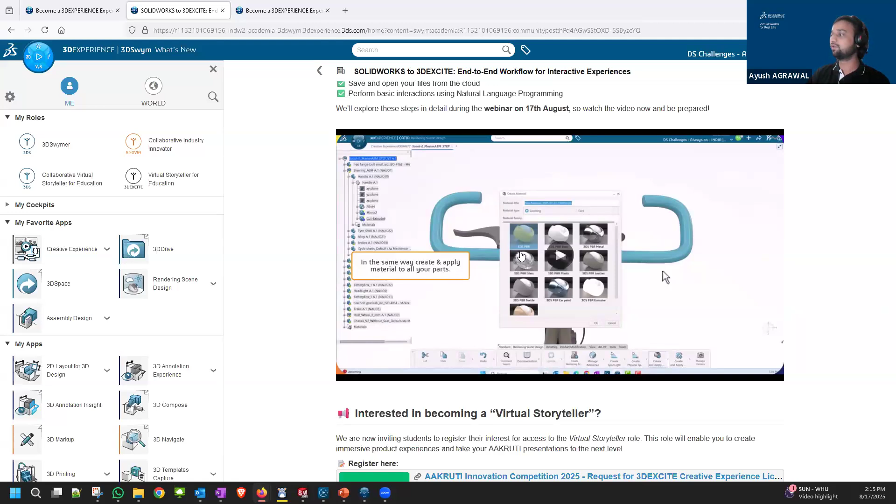If you scroll down in this post, you'll see a link, which is a survey link for registration. Anyone interested in using this application has to register here, and that will give you access to the Creative Experience app. Basically, you'll get the role of virtual storyteller for education. Please register here as soon as you can, and you will receive an email confirmation that you've been granted this role.

Once you have access to this role, you should see this Creative Experience app in your compass. Basically, you have to click on the compass. In the search bar, first make sure you have this role, virtual storyteller for education, and then go and just type Creative Experience, and you'll have this role.

Now, the first time you try to launch it, it will not launch because you have to first install it. If you click on this dropdown - because I already have it, it's not asking me to install - but for your case, it will ask you how to basically install the app on your computer.

One thing I'd already suggest is make sure you install this application on a good system, because the minimum system requirements would be at least 32 GB of RAM on your computer and a dedicated graphics card like AMD or NVIDIA. If you have that, then you can install.

Let's start. This is my product, an electric scooter. What I have to do in SolidWorks is just go to Save As. Then in the save type, the format drop-down, there are multiple options for exporting.

For this case, I'll suggest we go with the step file because it's a universal format available in most CAD or parametric design softwares. But if you're using SolidWorks, you can also export it as a SolidWorks assembly or SolidWorks part, which is also accepted by the 3D Experience app.

For now, we'll just export the step file. Please check that the options of your export fit your purpose. For my case, I've selected the step format and solid surface geometry export output. I'm exporting everything—the faces, the export appearances—and once you're done with your settings, just give it a name. I'll name it scooter session 1, step file, and save it.

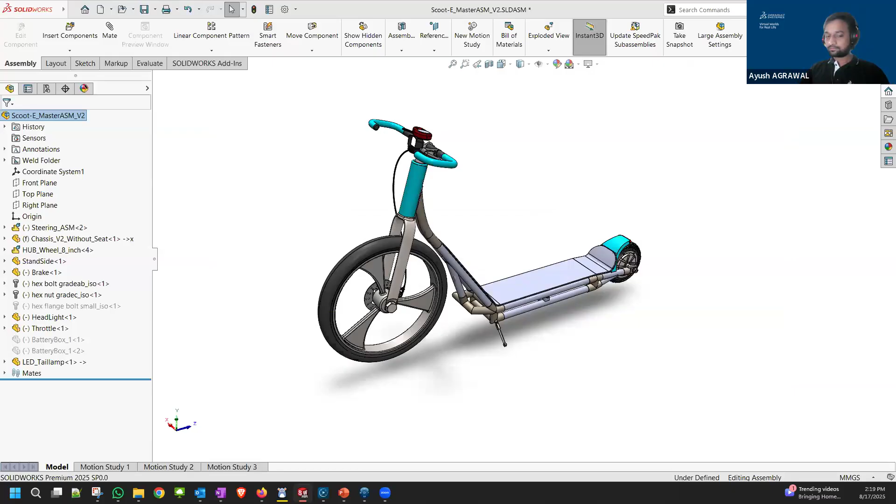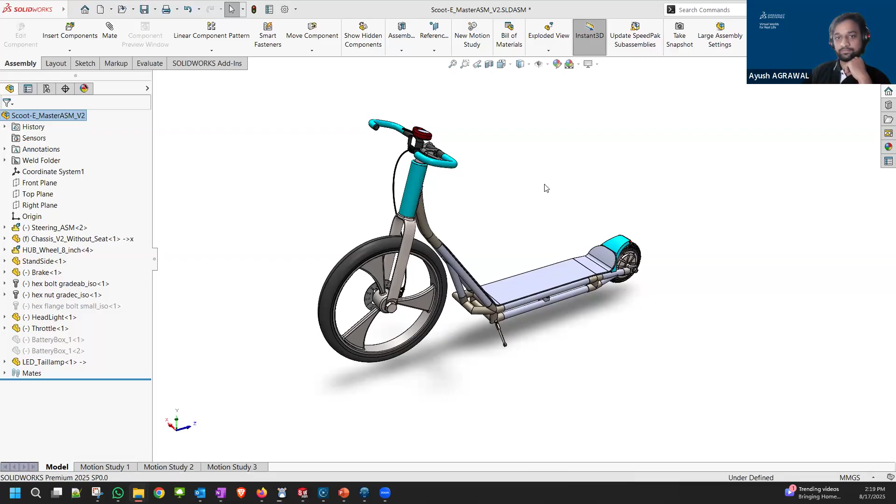It's exporting. My export is done. I have my step file.

Now the next thing we do is just go to the platform. Go to your student community—that's good because you're already on the right tenant.

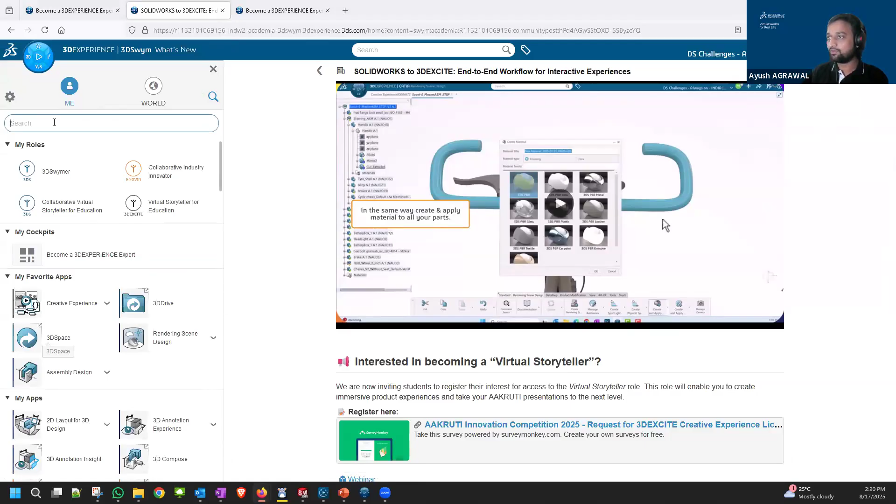Before we launch the Creative Experience app, the first thing we need to do is set up a collaborative space for your team if you haven't already done that. But I can quickly show you how to do it. Again, on your compass, search for the 3D Space, and I'll tell you why we're doing this.

That opens the collaborative spaces. You'll see I've already created a collaborative space, 3DEXCITE AAKRUTI 25 3D Experience Training. If I open it and go to members, I've already added Pradnya as a leader and owner, because the first thing you have to do is import your product onto the platform, onto your cloud.

So I go back—how do you create a new collaborative space? You just click this button available here, write in your team's name, whatever it is, and your product. You give it a description if you want, keep the family as design, and visibility as private.

Once you create it, share access with your team members. For example, this is the 3D space you created. Go to this eye symbol, and in the members section, click add members and start adding people. Please add your direct team members as leader and owner or author, since they'll have access to add more content.

They'll have rights to rename it, delete it, those sorts of access rights. If you add contributor, they'll just be able to view it. All right, we have our 3D space created.

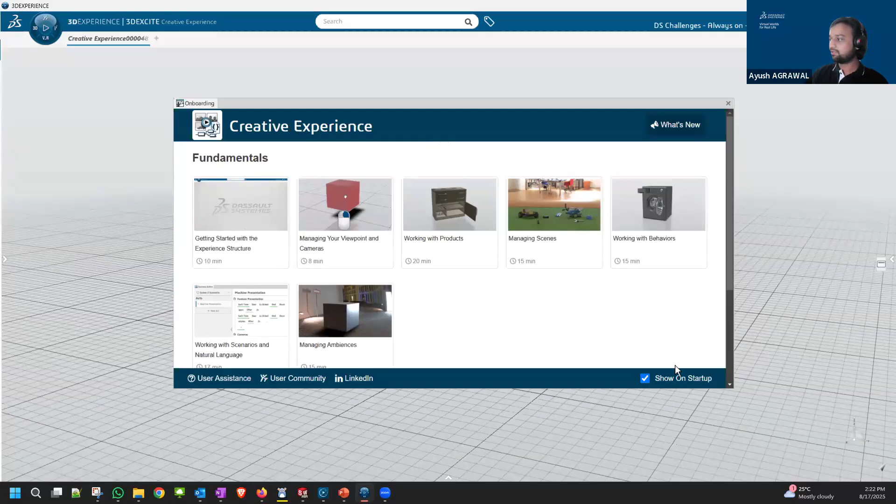So this is already a good guide. If you have any questions or are confused on what to do, you can refer to these. But for now, I'll close this. When you close it, it opens up a scene.

So it already creates a creative experience. So here you see our creative experience has a random name, but afterwards we'll rename it. Now, make sure that in your creative experience, before we import anything, you drop down here and check which collaborative space you are inside.

You might be in the common space, which is accessible by all the teams in the AAKRUTI contest, but you have to select your private collaborative space so that your data remains with yourself and your team. Once you have selected your collab space, next thing we do is import.

Now, a thing to understand here is that there are two kinds of imports that we'll do. First, we will import your product on the collaborative space, but that doesn't mean it's already in the Creative Experience app. We have to then insert your product on the Creative Experience app afterwards. So first step, click the plus icon here.

Before I do that, let me give you a little bit of context. So here, this is your browser, which is the cloud-based platform. Once you click on the Creative Experience app, it launches this window, which is basically not the cloud, but a native app that you have installed on your computer. It's called the 3DEXPERIENCE Launcher. I hope that makes it clear.

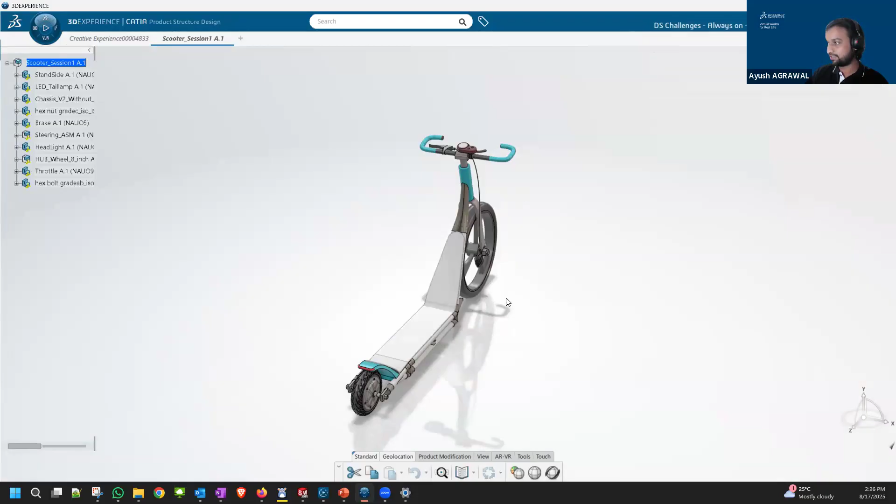Now what you see here is the product imported on your cloud, but this is not in Creative Experience yet. If you look at the top here, it is telling you it's CATIA product structure design, meaning it is just a preview of your product that has been imported, right? And it is not yet in your Creative Experience.

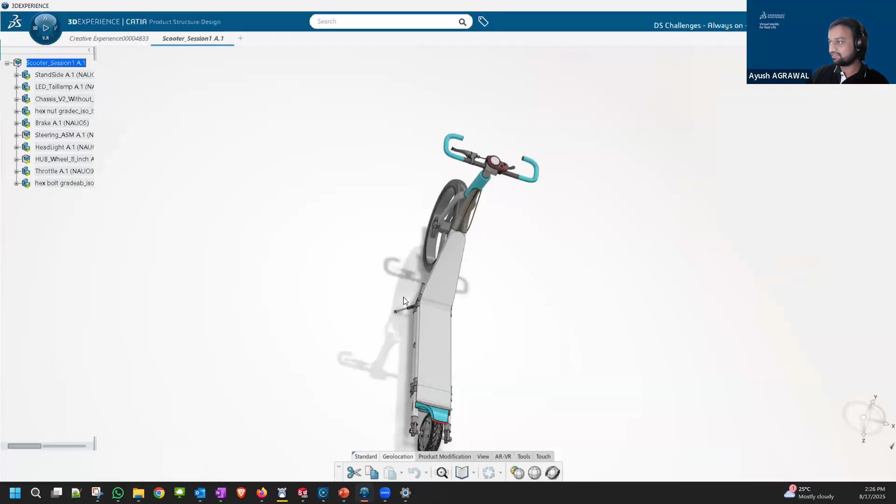If I go to the Creative Experience app, you don't see anything here, meaning you have to still import this product in your Creative Experience app. Now there are multiple ways of importing, but first thing that I would suggest to everyone to do, and it's very important: once you import the product and it gives you a product preview in the CATIA structure design, right click on the top node of your product and go to the properties.

You go to the properties, and it will open up this dialog box. It tells you a few things.

What I'm going to do is copy a few things from here. I'll copy the title, which is the name of your product, and put it in my notes. I'll also copy the PRD name, because imagine you have 3 or 4 team members working together on a product. Everyone exports different files at different times throughout the contest, so it might be possible you have the same title for your product.

So if your product is a scooter, you'll always name it a scooter or something. But when you import it, you get a unique product name - it's a PRD name, a PRD ID. You'll see this is always going to be a unique ID.

This is very important because, for example, if I exported this today, the PRD name is always going to remain the same. I can edit my title, but this stays the same. So every time I want to import it in Creative Experience or any other app, I can search it via this PRD name. I copy it and paste it into my notes so I don't forget it.

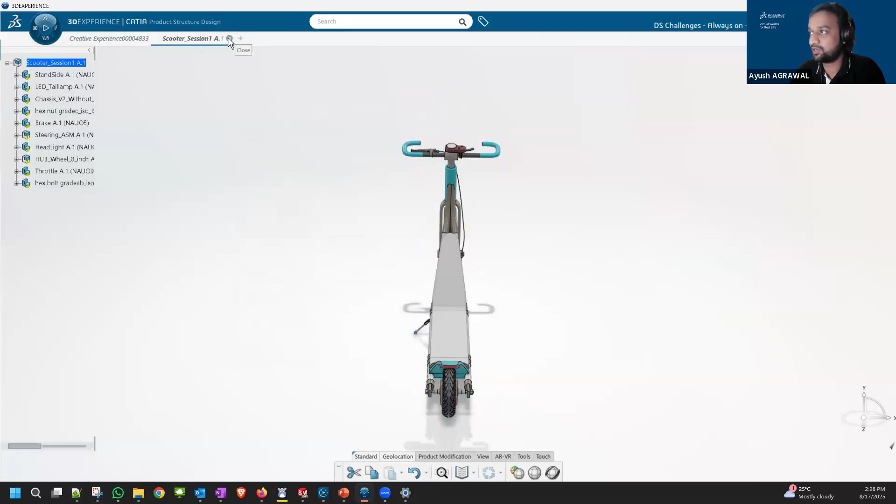Now I close this dialog box, and you can also close the product preview because you've already copied the properties and the name. Now you close this, and what you do next is go to your creative experience.

So we've switched back to 3DEXCITE Creative Experience app. On your 3D actor, you right click and say insert a product. Remember, we first imported from here, but that only imported our product into our collaborative space. Now we have to insert that product from collaborative space into our 3D experience scene.

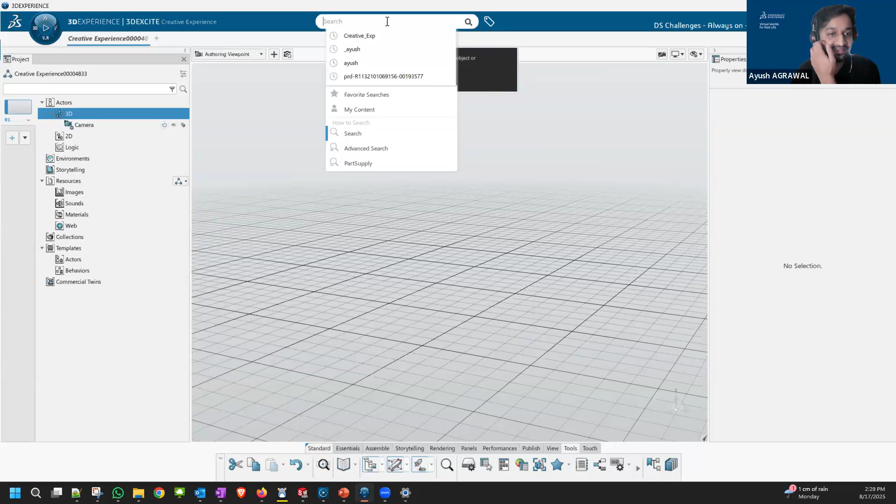So I right click on the 3D actor and insert existing product. Now a search dialog has appeared, meaning I can go to search and find my product. I can write the title of my name, but as I said, I always prefer to paste the PRD name, and now hit enter.

If you see this finger icon, it means you're still in the search and open process. Now it has found my product, and I just double click on the product.

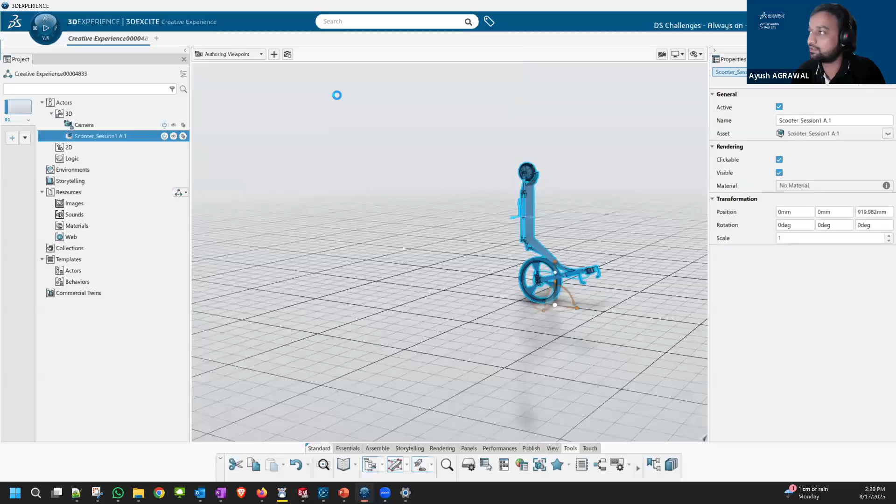And it has imported the product into the creative experience now. But you see, in creative experience, it's not looking right because it has some wrong transforms on the product. It's very easy to fix.

You just click on the scooter session or your 3D product, and if you right click and go to properties again, it opens up this dialog box where you can fix your transform. You see, I can just put 90 degrees to rotate it.

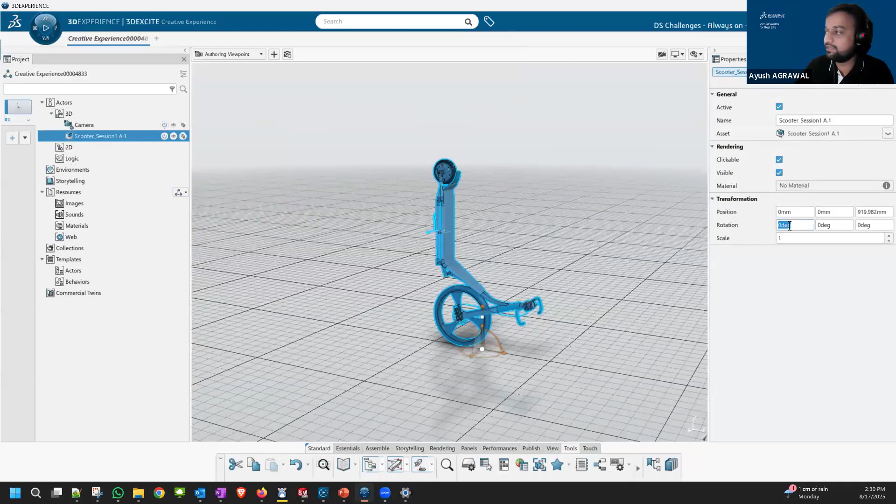And on the position, it's already flying 900 mm above, so I'll just put 0 and it goes back to the origin. Now that is it.

You have your product imported in your collab space and also inserted in your 3D experience app. The last thing to do is save your creative experience. So we'll first rename it - we'll rename it as Creative Experience Session 1 for today.

And to make it easy to search, I'll write my name at the end. This is what I always do and can recommend to you too - it makes it easy to find if you're working in a team of 4. I just hit enter, and now you see it's also renamed here.

And to save it, you have to go to this share icon or the arrow and click it, and here you have the save option. If I save it, it saves. And when you save it, this creative experience is again going to be saved in your collab space that you've selected. So you just save and you're ready.

What you do next - for example, my team member Pradnya is the person who's going to create some experiences from this app. I'll just copy this and put it also in my notes so I don't forget it. And then I'll tell Pradnya, hey, on my side, this is the creative experience that I've saved. Go ahead and you can make your animations or creative experiences out of it.

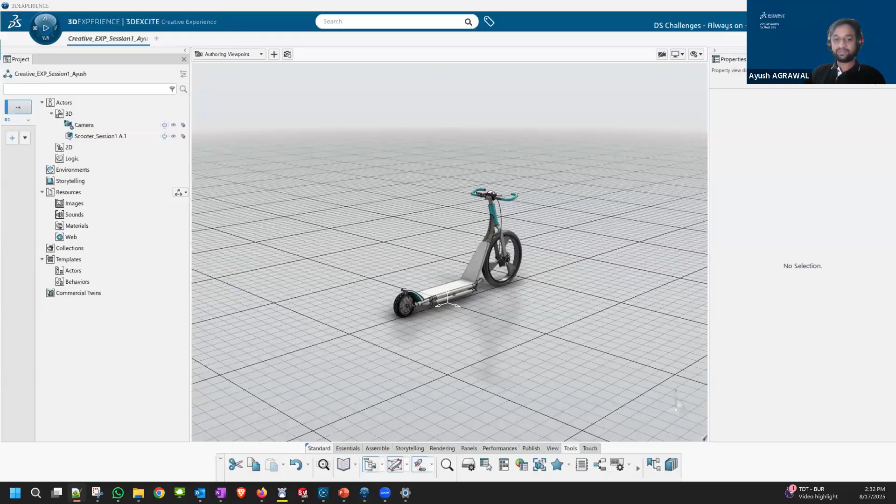I hope that was an explanatory session on how to export your product from SolidWorks or any 3D app, and import it into creative experience. Now I'll hand over to Pradnya, who's our storyteller, and she will use this creative experience to further process it. Over to you, Pradnya. Thank you, Ayush.

I'll just quickly share my screen. Can you please confirm if it's visible? It's loading. Yes, it is. Yes, perfect.

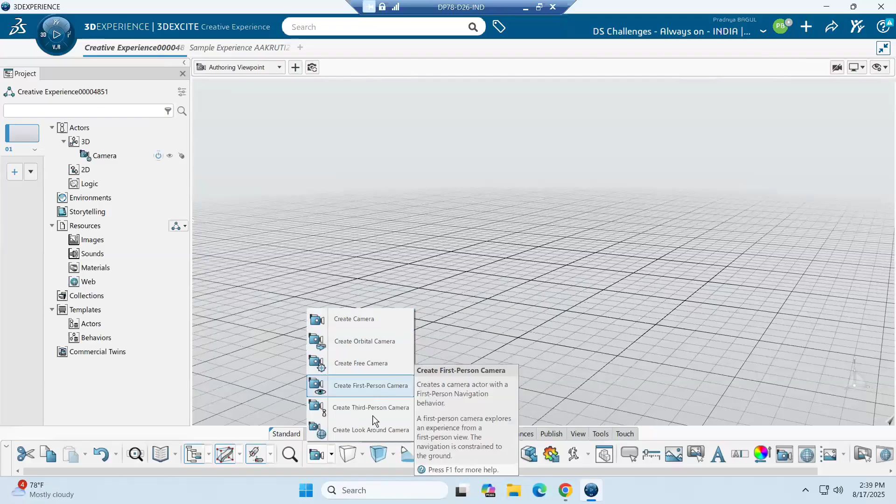So even in cameras, you have multiple options. You have a plain camera, you have an orbital camera, you have a free camera which can be moved into all directions. You have a first person camera, you have a third person camera, and you have a look around camera.

In the storytelling app, we are going to create a few scenarios, some experience animations, and in the rendering tab you can create materials, or insert your existing materials.

So let's start. Suppose I have the name or the ID that Ayush has provided, I can directly search, and then as it is a unique ID, you will see only one result, and you can directly go to your drop down and click on open.

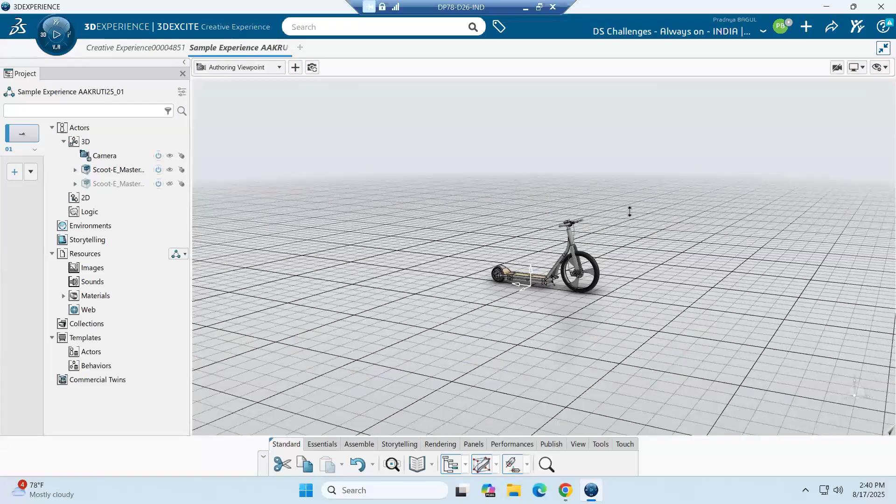As it will take some time, I already have it loaded into another creative experience. So when you click open, this is what you will see. This is what Ayush has saved, and he has mentioned, hey Pradnya, this is the ID, please work with this for your storytelling or your animations.

So when I import it, you will see your project properties, and your scooter, or your product properties. In this case it is a scooter. So you can explore, you can see multiple levels of this same vehicle, or you can also shift and click so that you can explore it together, and done.

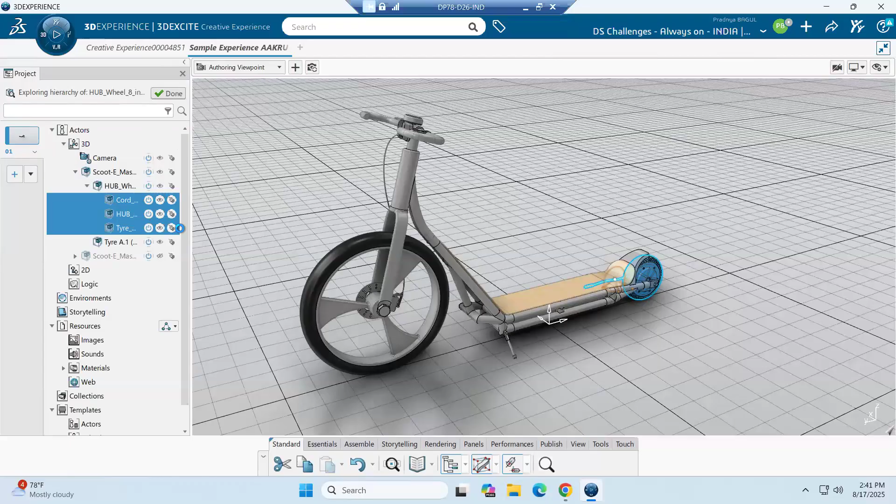So these are some basic parts exported from Ayush, and it is imported. So I have my hub wheel as a different geometry. I have a motor as a different geometry. I have tire, I have front tire.

So these are the subcomponents. It is a very easy term, it is a sub-component of your vehicle.

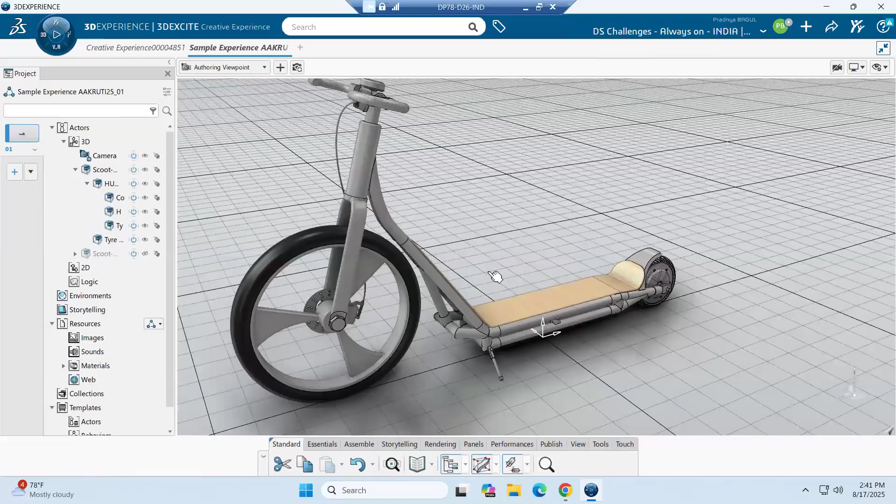Now when you open, suppose I am not comfortable with the grid or the planes or the axis that it is showing, and I want it to be smooth. I want it to look like just a product on a plain blank screen. So here you can go directly and turn off any lights if active.

You can turn off the cameras if any active. You can turn off the point, path, and grid. So now it is comfortable for me working without grid, but it is up to you. As mentioned, it is your ground to play, and with your comfort you can adjust.

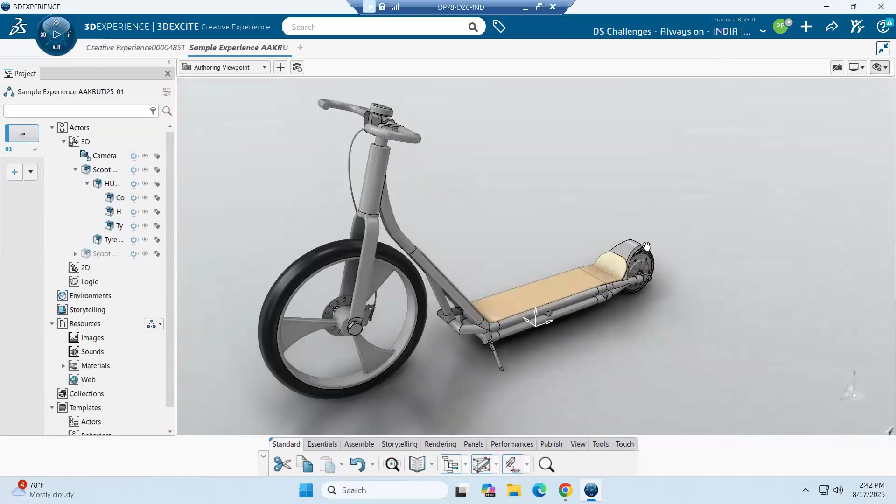So this is how you can control. The basic controls are with the mouse. You have left key, right key, and a scroll button.

So when you hit the scroll button, you can pan. Pan in the sense it will move only in 2D, so you won't be able to rotate. With panning, if you click your right button, you can rotate, and if you leave your right button, you can zoom. So it will take some time to get used to the mouse controls.

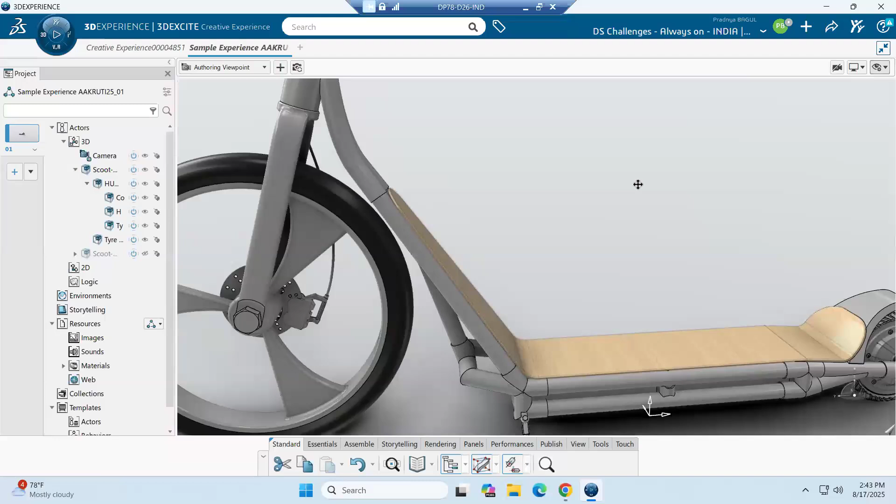It is very easy, once or twice and you're done. So I'm panning, I'm rotating, and I'm zooming. It is very important because suppose if I want to work with the wheel and I want to apply materials only for this nut, I had to zoom.

I have to check its properties - what are the parts, what material I'm going to apply for this specific part. So it's very important that you learn these controls. You can rotate and check. Initially, a tip you can follow is when you import your data, just rotate and see if all parts are imported.

If you see any missing parts - in my case, Ayush is my team member who was looking into SolidWorks, so I can say, hey, so-and-so part maybe was not exported, can you check at your end, what exactly has happened. So I can rotate and see - okay, I have my handle, my tire, these planes where the person is going to stand, both my tires, my disc, my support pipes, my bell, and also the light which I'm going to use.

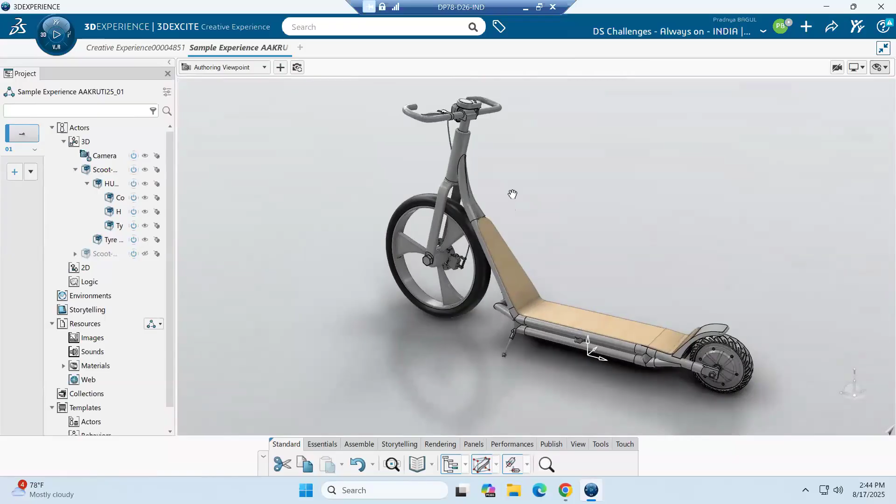You can check, it has no materials right now, so we can start with materials. The other application we use is rendering scene design, where you can apply materials to your scooter.

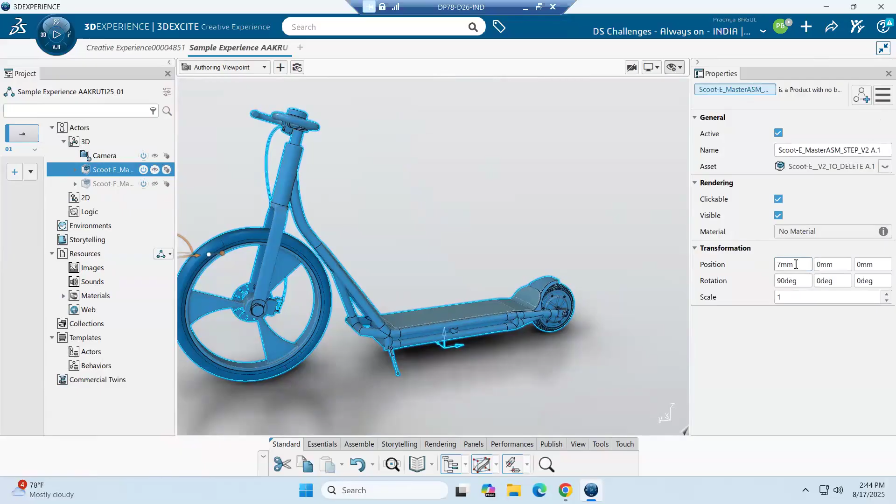When you go to your object properties, I just right click, open properties, and I see properties for my vehicle. Here you can adjust the position - you see I'm just changing a few values. I'll get it back to 0. You can rotate - if you see, I'm changing a few values, it is rotating.

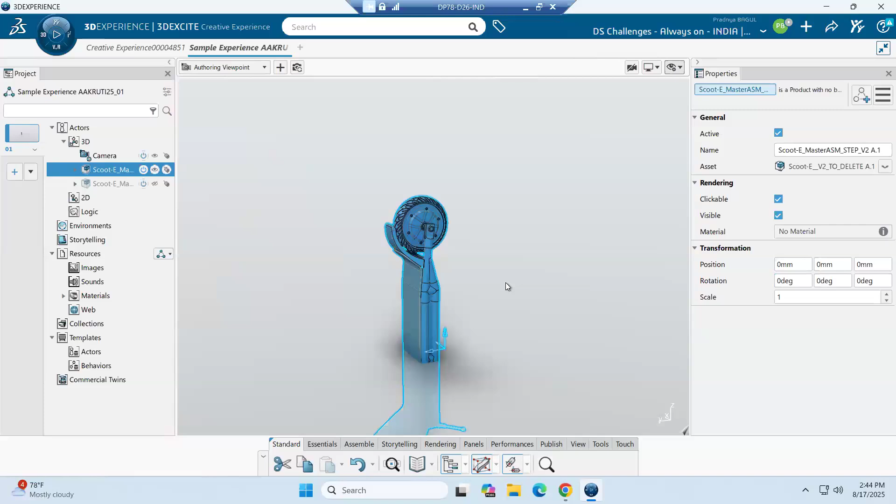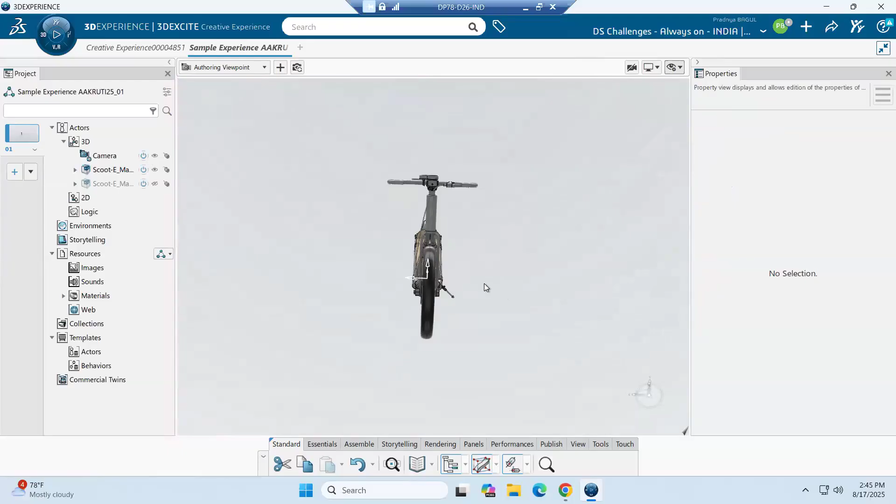This is my product, and you can also scale. So if you have a reference geometry - suppose a human is going to ride this scooter, and I already have a human inserted here, and I want to scale it. Now suppose if the human is so tiny and your scooter is so large, you can also scale the properties. So now it's at 1, I can set it to 10 - you see it has scaled it by a factor of 10. Now I get it back to 1.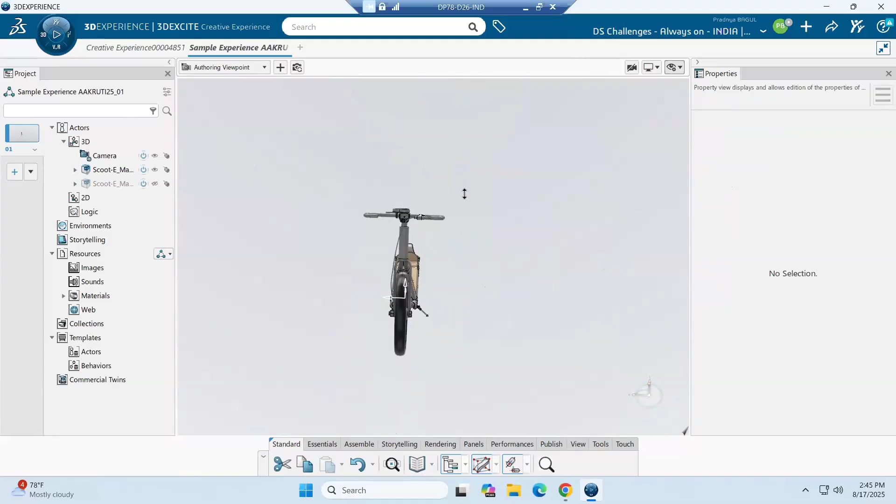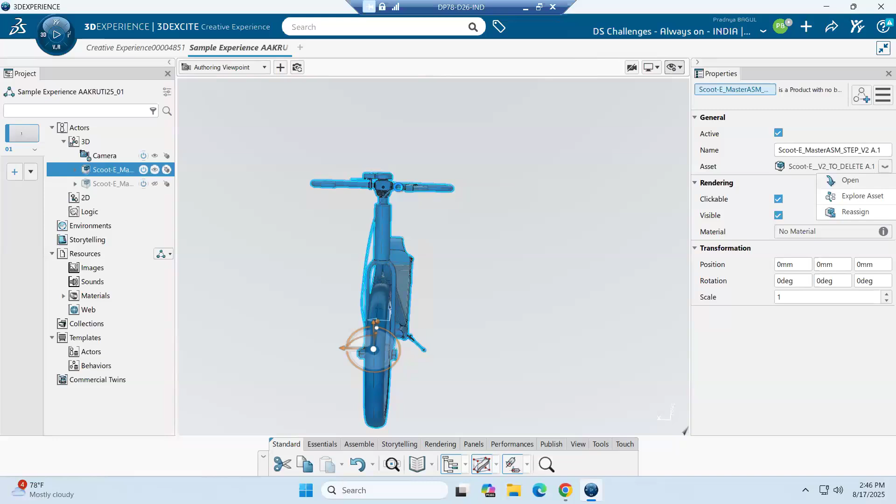When you go to your properties for your object, you go to the drop down and select to open. What this will do is take your product to rendering scene design, which is an additional application where we apply materials to our product. Same controls as explained - scroll button, right key and left key.

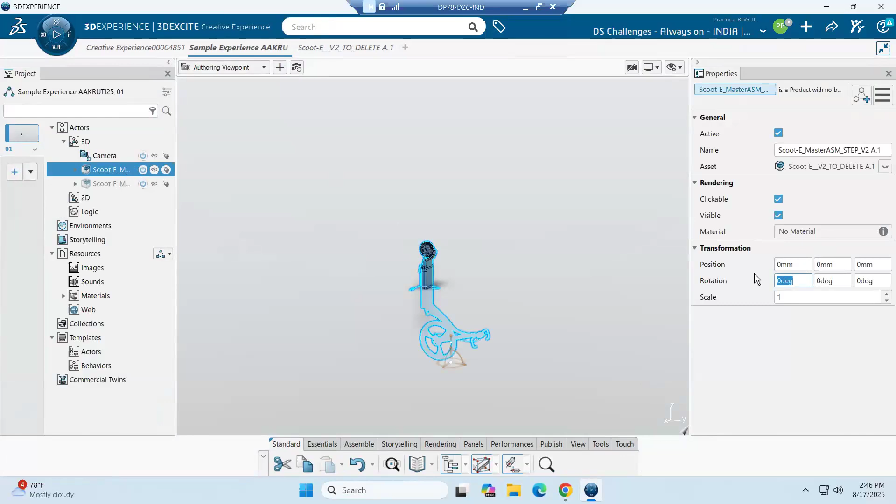Pradnya, you have applied a 90-degree rotation on the first axis. That is how I exported it. Otherwise... okay, yeah. With what axis? Yeah, the first one there. Okay, perfect, thanks. Thank you.

In this drop down in rendering scene design, you will have further options such as create and apply, pick and apply, remove, duplicate, create material from substance, and create material from AXF files. Majorly what we'll use is pick and apply material, remove material, create and apply material, and duplicate material.

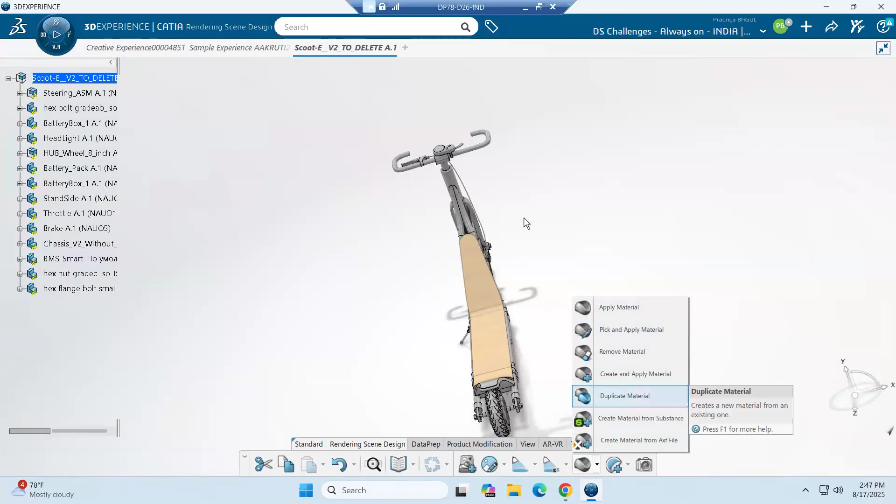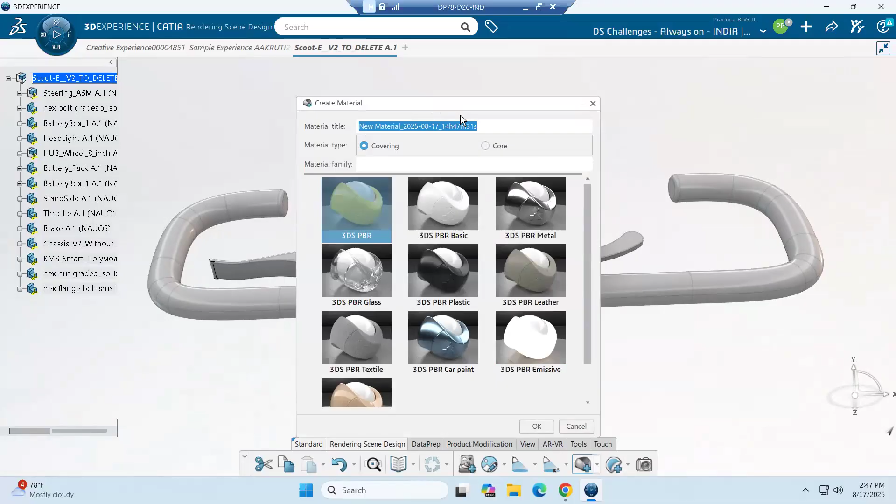Now suppose I have this handle and I want a blue color material for my handles. I'll adjust my product so I can see only the handle part, which is easier for applying materials. I'll go to the drop down, click on create and apply material, which gives me this dialog box. Since it's a handle material, my practice is to name it as handle, or plastic, or rubber depending on what it is. In this case, suppose I want the name as plastic, assuming it's plastic, the color blue, and you can also give your own name.

I'll start with Pradnya - this is a basic practice where you give a unique name to your materials because you're going to have many plastics in your product. Now I wanted specifically plastic blue Pradnya, or since I'm applying only to the handle, I can name it plastic underscore blue underscore handle. So it's going to be a covering material, not a core material.

You now have multiple options such as 3DS PBR, basic, metal, glass, plastic, leather, textile, car paint, emissive, and wood - these are some already existing materials. Now we will go with 3DS PBR. The question is why - because when you click OK, you'll have a material created as 3DS PBR, and the controls you have with this material's properties are more extensive. If you go into metal, I can only control the color and the saturation of the metal.

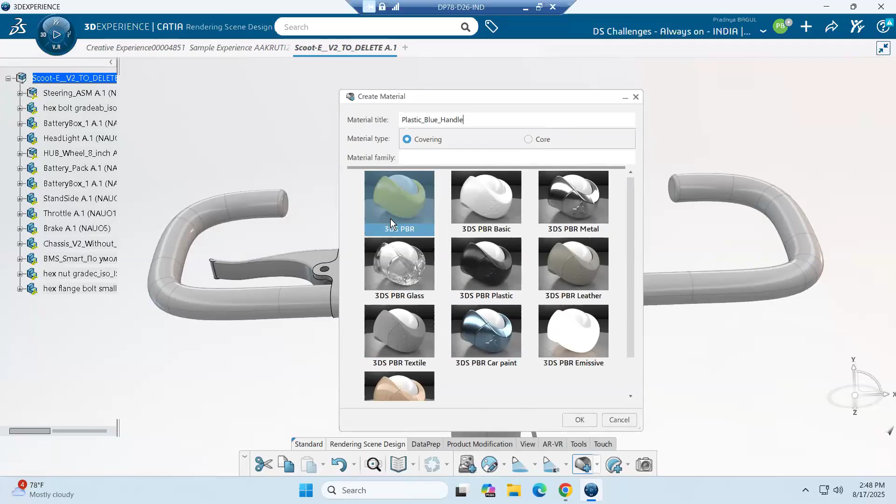If you create a 3ds PBR, the very basic material with the covering and the name, you will be able to handle multiple properties. When we mention properties, what exactly they do, you will get to know further.

So I have this material created in session. I want to apply it to this specific part or this specific part, so it will show you the highlighted parts where it is going to apply.

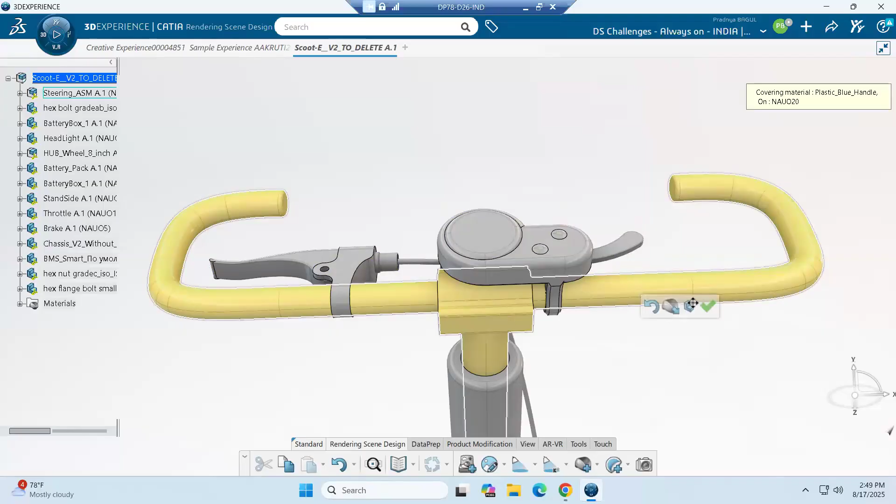Because I want to apply it to my handle, I'll left click, and I have multiple levels. I can apply it on our main product, and if I click this, the entire product will have this material. But I want it only on this part, only on this handle, or only on handle faces. So I want it here, and I click on the green tick.

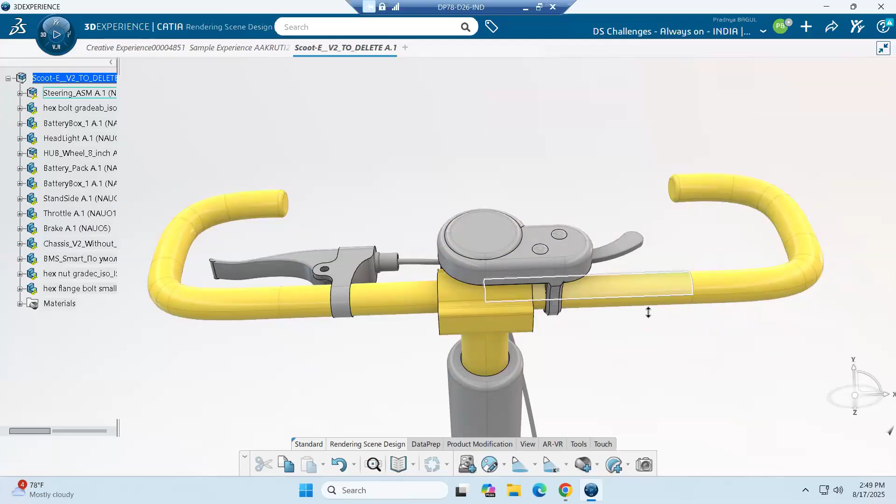If you don't click, it will not apply your material. Make sure that you click, and now you see the new material is applied only to our handles. It will take some time, but when you rotate, whatever parts were there in my geometry will get this material.

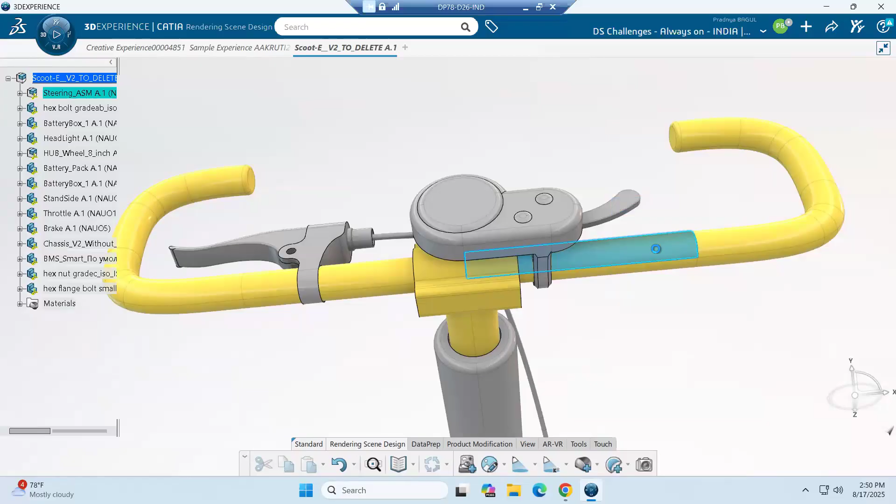Now I have my material created, but do I want it to be this yellow? No, it looks very bad. So I'll click on that product, then right click, which will give edit material appearance. If I click on it, you will have all the properties visible through which you can handle your material.

I can move my product a bit to the side. I can zoom in to have more properties visible. You can also see a preview of your material, but with these live changes, you can actually see how it is going to be visible on your product.

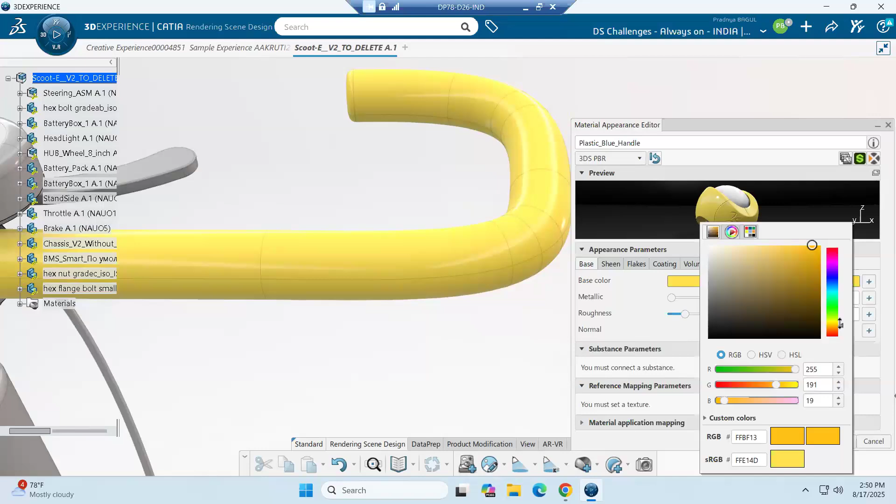So for the base color, I want it to be blue. If you have some specific RGB values, you can set them here. You can also play with your HSV values or HSL values.

Now I don't have any values right now, but if I have them—suppose my teammates and our entire team have decided, hey, I want so and so metallic blue color, and the RGB is 12, 13, and 126, just random numbers—I have no idea what material will get generated, but I have my values, so I can enter here the values which you have decided.

Or, as I'm doing right now, you can just check manually by rotating our point here. So you have the full range of materials, and you can see it here on your vehicle simultaneously in the preview section, checking how your material is reacting to your changes.

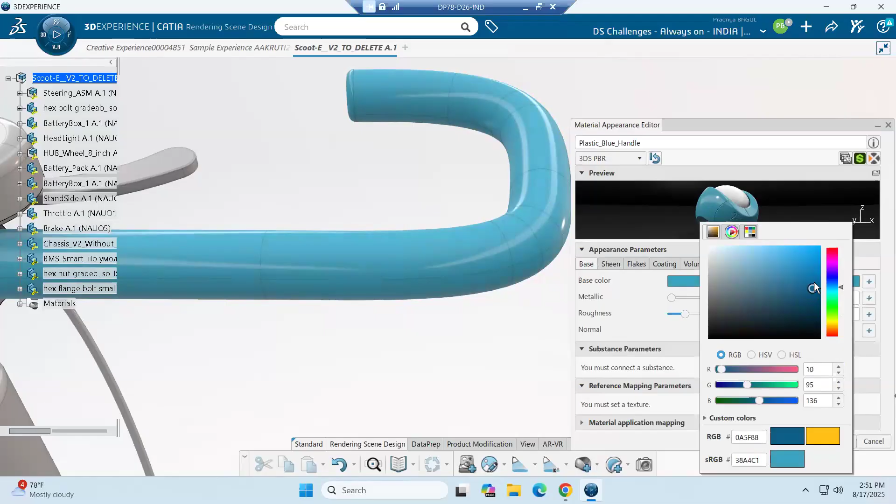So I feel this is some color which I am liking with my product, so I'll say okay. I can control my metallic properties. Similar with the application of material, you have an open ground—it is an empty canvas, you can get all your imaginations in.

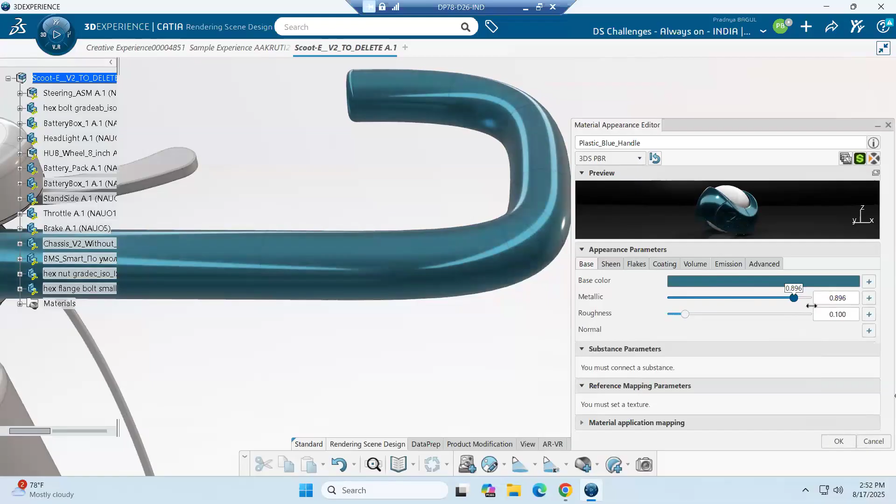You also have some very basic tutorials on YouTube or any books, any tutorials on materials. You can take these properties and just adjust. Now I feel that, okay, it is a plastic, so I don't think it would have such more shine to it. It won't have any metallicness, so I'll keep it at 0.

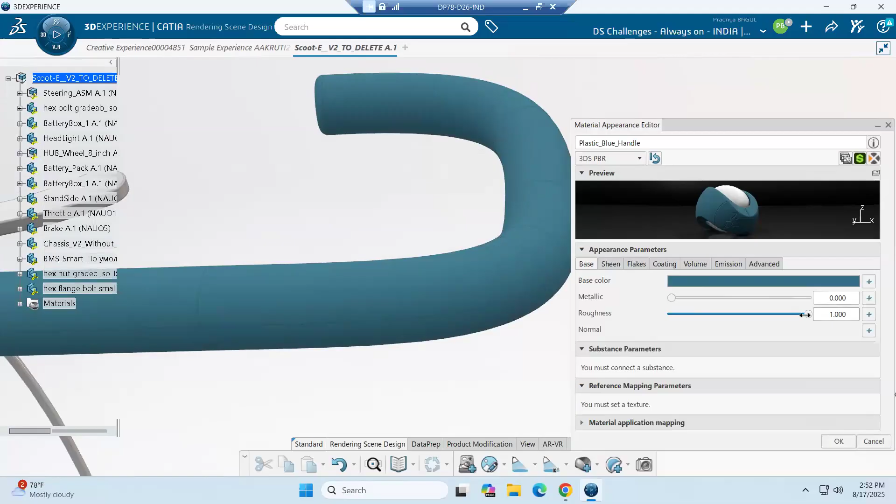Now for roughness, I feel my plastic is going to be very rough. So when I change it to the maximum limit, you see all the lights or reflections from my material are gone. Now I feel that, no, this is too rough, and I want to change it back, so you come back and just play with the properties.

Now you go into sheen, you go into your flakes, you go into your coating. I want my clear coat intensity to be more or less, so I can just play with my properties. You also have your clear coat roughness.

Now, my clear coat is the upper shining layer of the material. I want it to be very rough, so I dim it down, and you can see here how it is reacting to your materials. Now I get it down.

You have multiple properties, as mentioned. It is not something to be scared of. You can have your references and just create materials for your entire vehicle.

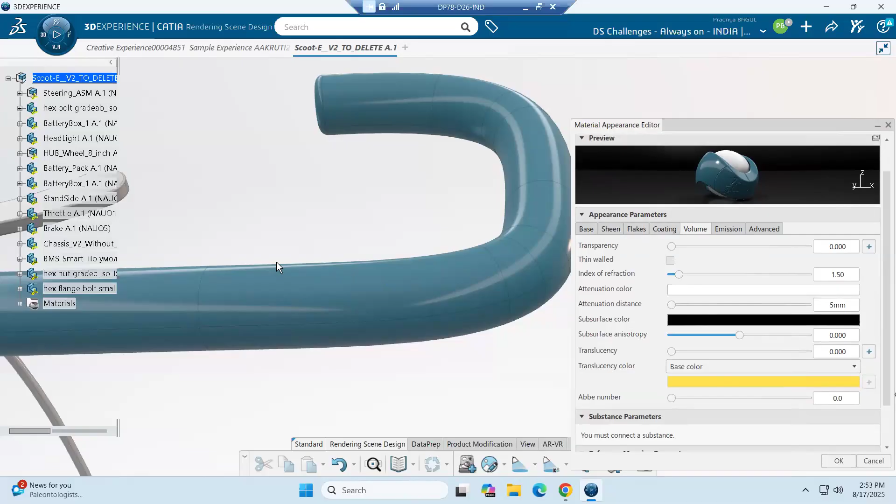Now, suppose this is my desired material. I have changed everything I could, and now I want this specific color, this specific properties to be on my handles. Now I know that my material is ready, the name is correct, and it has applied to the correct parts, so I click OK.

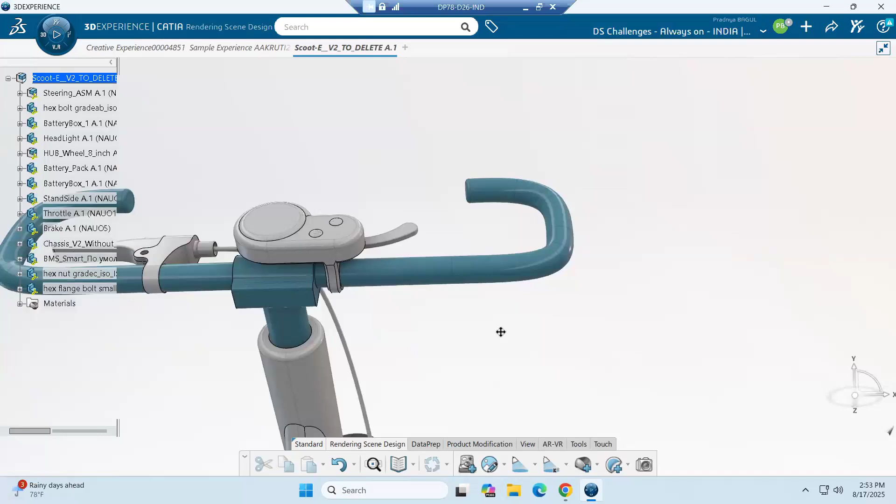Now you see, it has reflected on the parts that I have selected, and the other parts are gray.

So your task until our next webinar is: install this application, create materials, and apply it to your entire vehicle or whatever product you are designing. Please apply all the materials so that by the next session, you already have all your materials ready with your product. Now, this was one type.

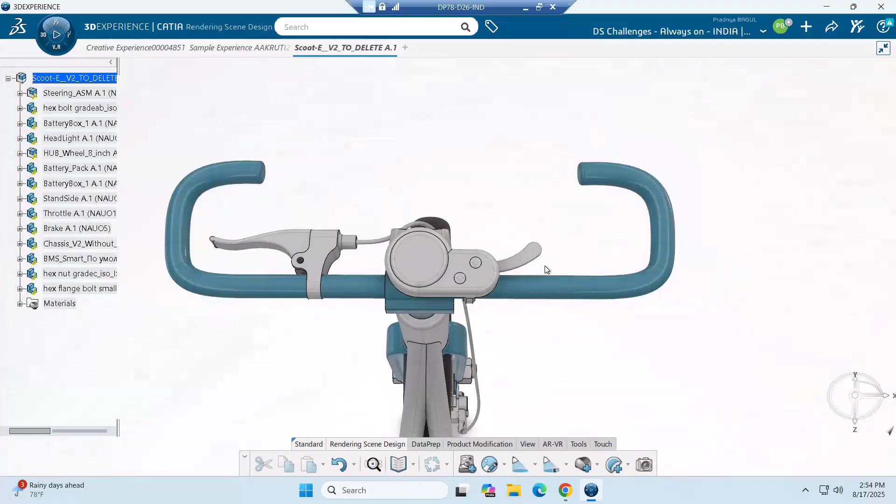Now I feel this material I want also on these brakes. Generally we don't, but just to show, I can pick and apply this material, and it will give me selection properties asking where I want to apply it. I want to apply it here. I'll just left click OK.

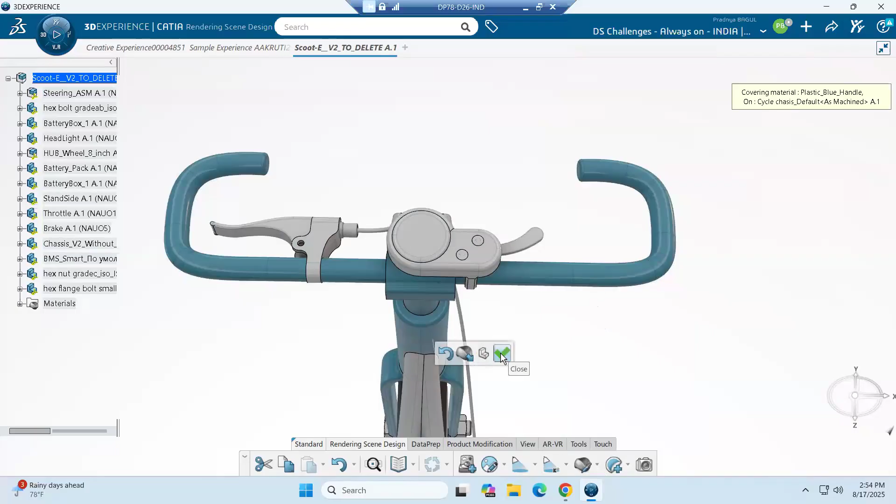Now you see, I don't have to recreate the material. I can just pick and apply, for materials such as black plastic, black rubber, or black leather.

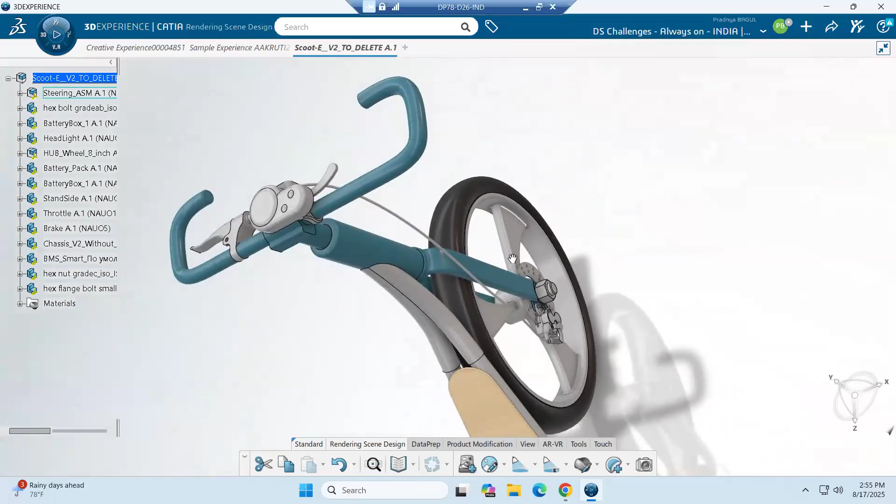In vehicles you have it on some major parts, or let's say bolts and nuts. I want it to be a particular alloy, steel, or plastic. Now I have multiple nuts and bolts in my vehicle. Suppose if I create one and apply it here, you want it applied to all the parts, such as 1, 2, 3, 4, and also the rear wheel. So do I create this material again and again?

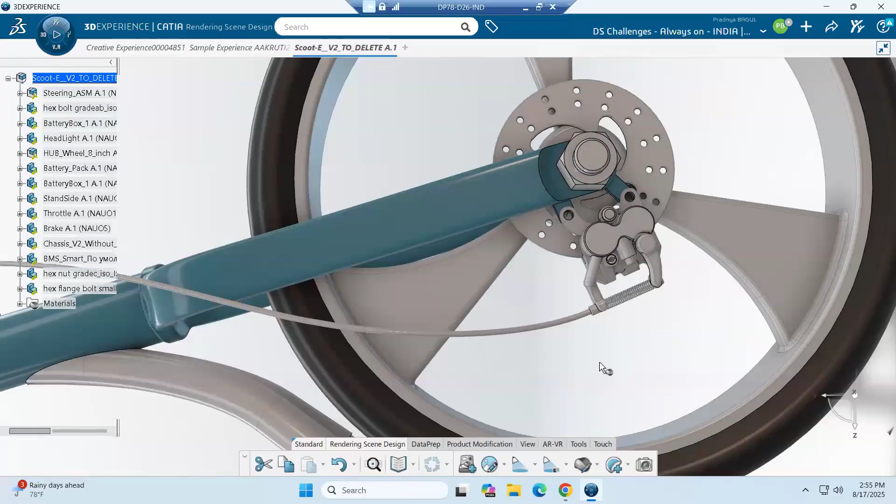No, you just go to pick and apply. You pick your desired material and apply it directly to whatever part you want. And this part is wrong, so I do an undo. If I select and want to go back, you can undo your last selection, and you can press escape, which will close your pick and apply term.

Now what is remove material? I have it applied here on this handle, and also on this part, but I don't want my material on this particular part. So I can just remove my material by clicking on the part, and it will go back to the properties that already existed with the product.

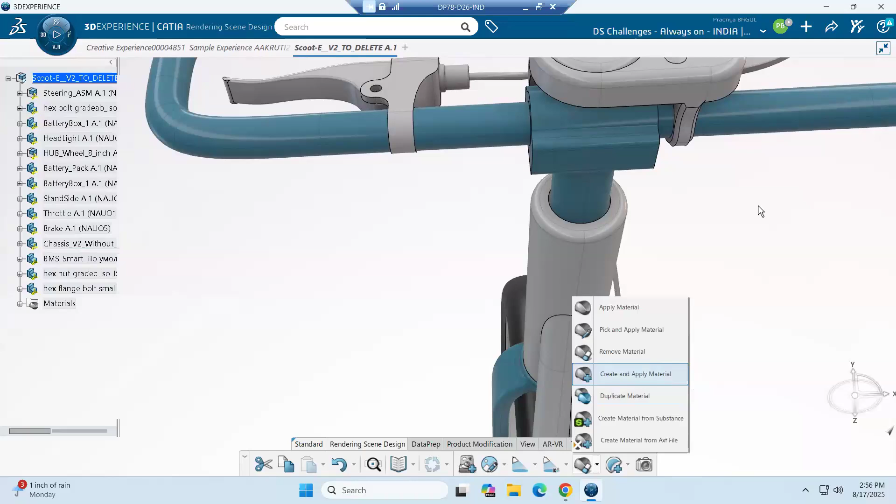Next is duplicate. Suppose I have my parameters ready for the plastic, and I know it's the same material, same properties, just the albedo, which is the color, is different. Now I want to give you a red plastic, so I can duplicate the material I've already created. You can also have multiple materials visible here. I'll apply it and change its name to red plastic.

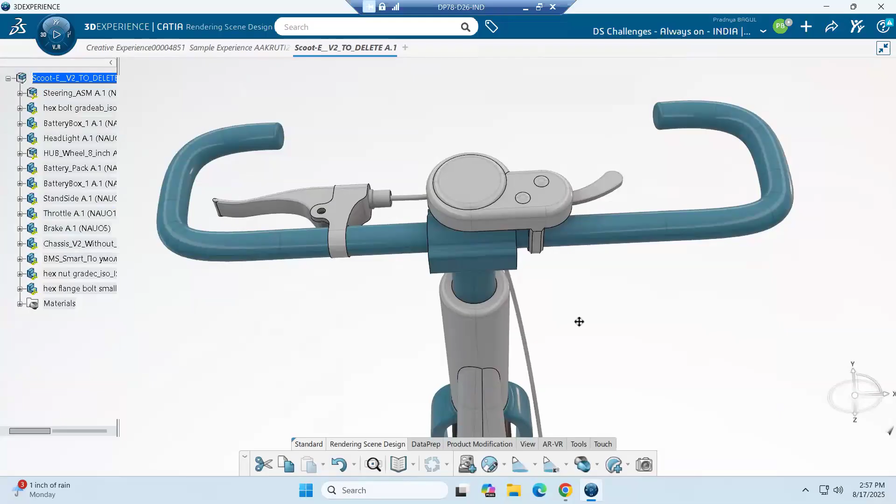And then similarly, suppose these are all my materials. I have this black plastic already. Give it some time. It is taking some time, but as you can see, it creates a new material from an existing one.

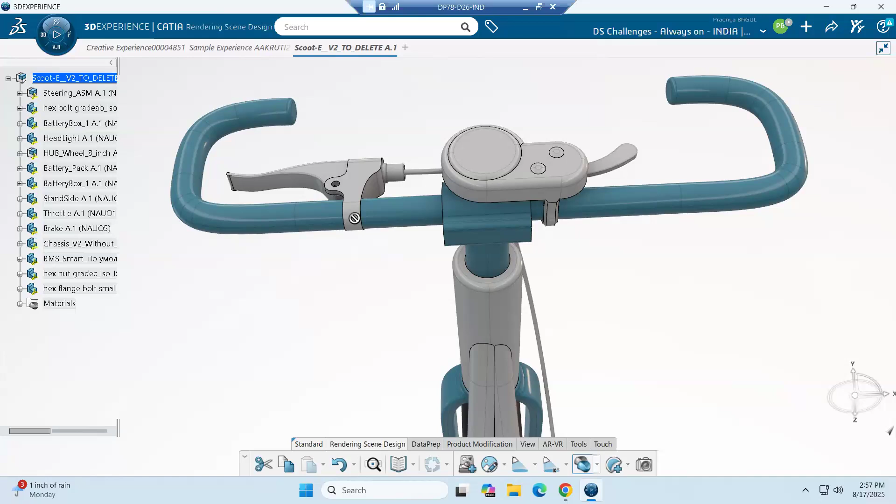You can create your existing material, apply it, and then duplicate it by changing its properties. So this is how you create and apply materials. The more you explore, the more you will get to know.

You can also play with textures, and different maps such as normal maps, or play with the UVs of the material. But that's something we can discuss further in our next session. I see we are already short of time.

So you can apply your materials, play with the textures. I recommend you go and find references on what material is, and what PBR material does. If you have a notepad handy, note down these points on the different types of materials. Now I explained PBR, that is physically based rendering materials.

You can check what different materials are available, what different maps of material exist, what UV does to a material, or how you can change properties, what albedo was, what clear coat was, or how to check the metallicness of your material. The more you explore, the more you're going to get to know about your product.

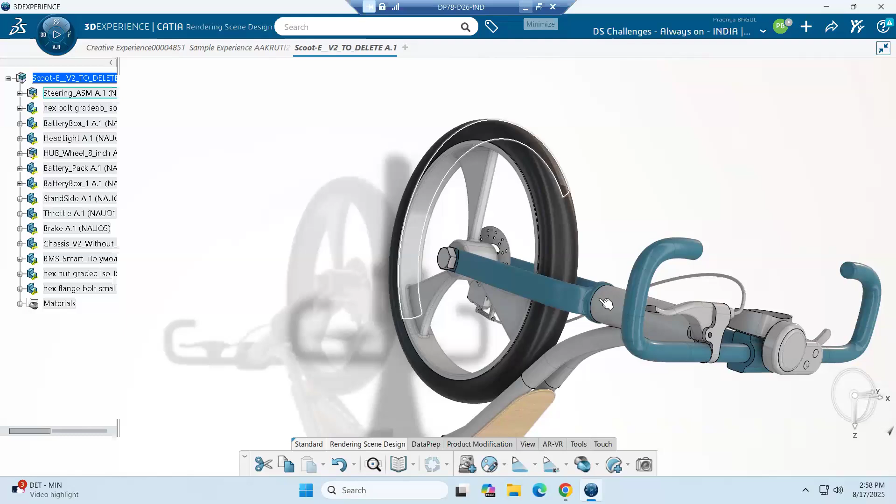And as you can see, I have this loaded here in my creative experience, the changes I do in my rendering scene design are automatically going to reflect in my creative experience. The product has synced, and whatever changes I do in my rendering scene design automatically reflect in my creative experience application.

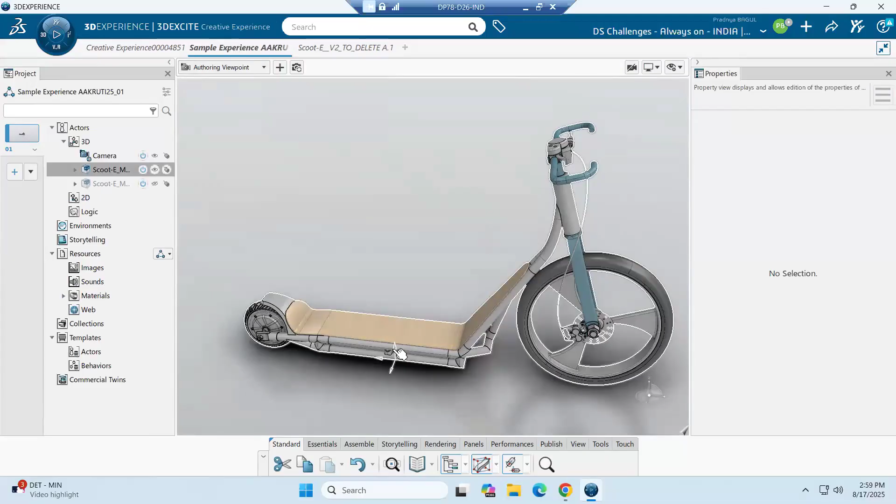You see the properties, whatever blue plastic I had created, it is already applied on my handle and the geometries which were inside that product. So this is how you do your live rendering or live material applications.

And once you're done, just hit Control S, which will save your creative experience, so that next time when you open, you don't have to create all the materials from scratch. You already have your materials, and later you can start with storytelling. So today we can end here with material application, creation application.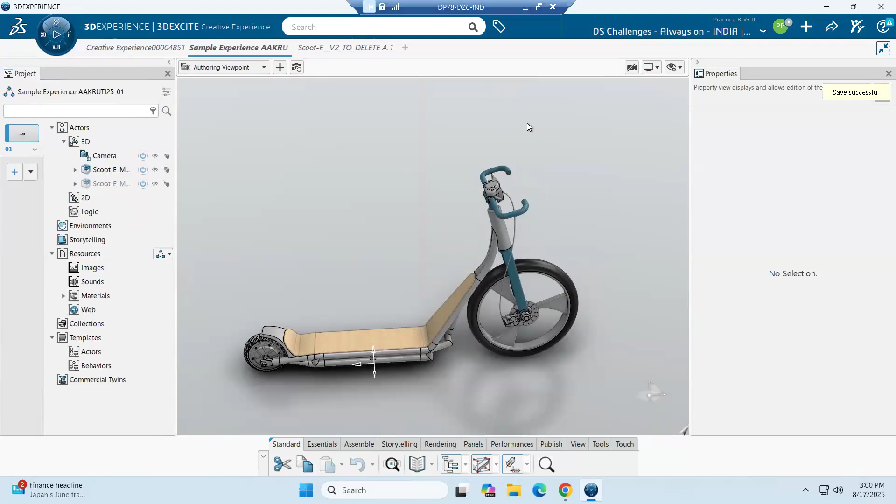I repeat again, in further sessions or further webinars, you can also see how you can import or explode or rotate, or also give certain animations. Now I have my two tires for my scooter, how I can move it the way you can actually run with your scooter. So if you have your application ready, you can follow the same procedure as we are following simultaneously. That is why we are having this hands-on training, so that you can apply the same properties on your product, and you will enjoy your application.

So I guess, Kundlik, we are done here. Are we open to any questions today? Yes, I think there is only one question, but I think it's for us.